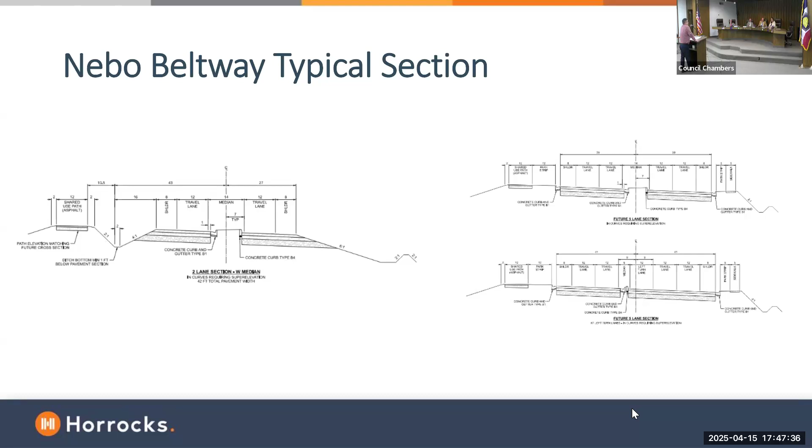There are questions about jurisdiction — we're building this roadway, but who will own it at the end of the day? We don't know that yet; that's a decision we'll have to encounter at a future date, a conversation we'll have. Ultimately, from a UDOT perspective, we have an appointed body similar to the council and mayor, led by people the governor has appointed to the Transportation Commission. They decide whether or not it becomes a UDOT jurisdictional road. With that, we're trying to build it to UDOT standards — this is a key component, so our structure will be big enough to accommodate the vehicle load we normally carry.

For accesses: you have I-15 on the left, those are the ramps we're going to be constructing, and you have Arrowhead Road. This is the area where TRI has primary ownership, I believe, which is slightly different than the station area plan we've seen. We plan most likely for a full signalized intersection halfway between Arrowhead Road and the I-15 ramps, and halfway between that intersection and the ramps or Arrowhead would be right-in, right-out access, with no left turn movements into or out of those intermediate corridor access points.

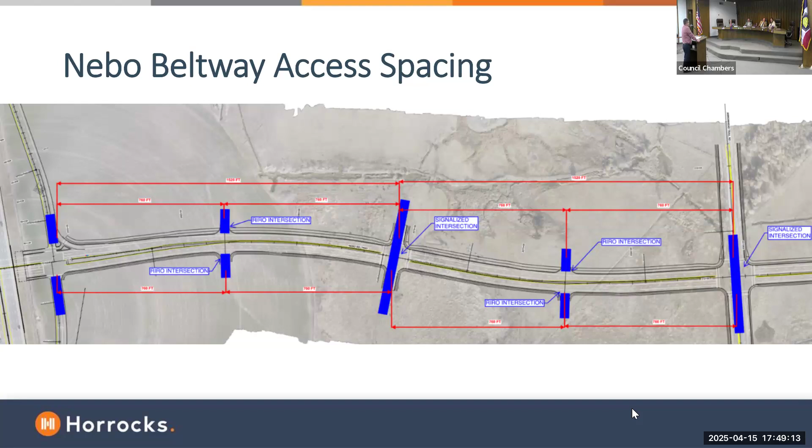That just helps facilitate, if it's built to our standards, then it's easier for us if that's the desire, for UDOT to take over jurisdiction. So that's a thought moving forward. The TOD plan that we've seen has two more access points in that same area than what we're planning for. Just big picture.

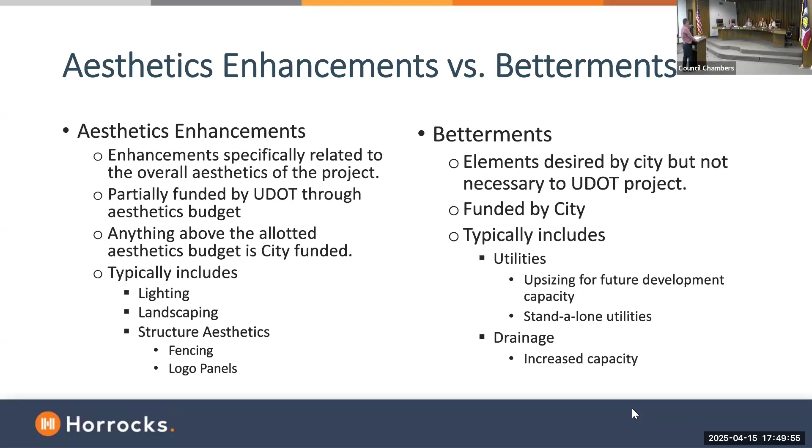Okay, going into the aesthetics, we're going to talk about aesthetics, pretty stuff, and also the betterments for utilities. We're going to talk about some of the baseline budgets, what would be included in our baseline versus what is over and above. We'll give you some examples, not project specific, just so you understand high level what we're talking about.

So the aesthetics along the roadway and at the interchange would be established by our aesthetics committee. The policy gives us a budget, $100,000 per interchange, and then 0.75% of the overall construction value. That's approximately $500,000 to $600,000 for this project. So that's money, in essence, that Payson can use for whatever they would like. If it's powder coating the signals, it would come out of that money.

And I'm going to go through some examples of what would be betterments versus baseline. Anything we want above and beyond that $500,000 would be great. So, conduit for irrigation lines, junction boxes for irrigation lines, conduit and junction boxes for street lighting that is not the UDOT standard. There's been some changes recently in state law with this last legislative session about street lighting. We'll cover that as well. Any questions about this baseline budget?

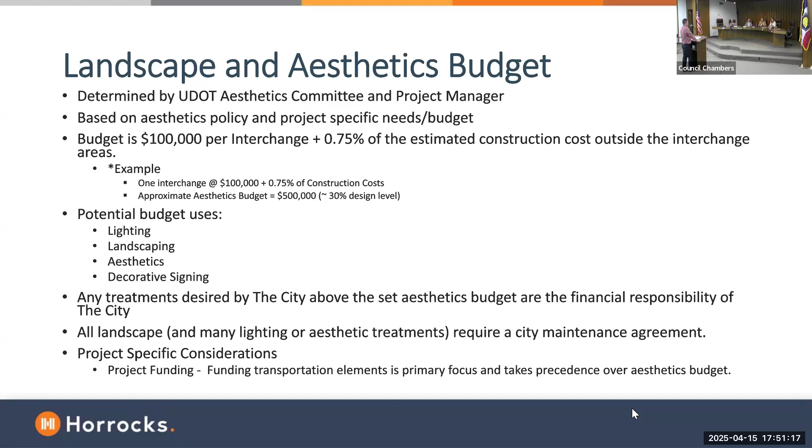Okay, let's go to the next one, Jim. So from a street lighting perspective, Councilman McHugh, this is slightly different than the information we gave when we met with you in the smaller group conversation. As we went back and reviewed the policy, there's some modifications. So it's street lighting at the freeway ramp and termini points, as well as at the signalized intersections. Our baseline does not include street lighting along the corridor. If the city would like to do that, that's an option, and we'll cover some basic costs of what that would mean.

The recent legislation change is, it used to be that anything behind the curb and gutter, including the street lighting, was the responsibility of the local government. The legislation has taken street lighting off that table, as long as those street lights are designed to UDOT standards. So if the city desired to install UDOT standard lighting, one, it's a less expensive fixture, but long-term maintenance becomes the responsibility of UDOT. If the city desired to go with decorative lighting, that's a cost, and the long-term maintenance becomes the responsibility of the city, because that's different than our standard.

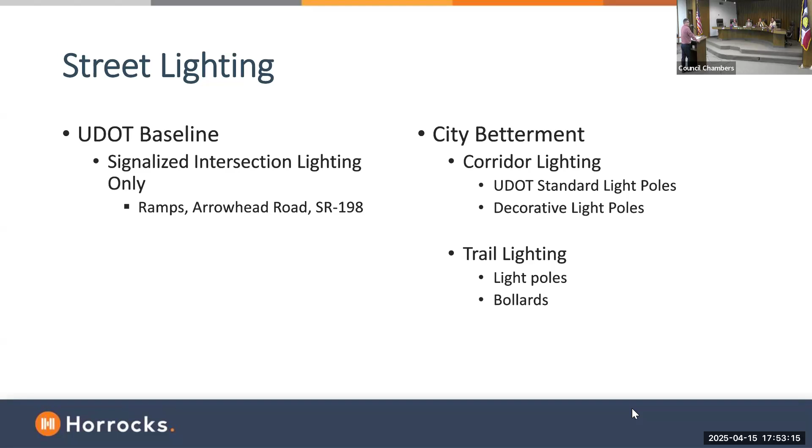That's what would be expanded. What are the requirements as far as how far apart the lights have to be, how many there have to be? I think it's about 200 feet. It would go through a lighting design, and based on the particular roadway or the luminaire type and how it throws light, these standards call for about every 200 feet.

So with the dual arm, UDOT covers that cost 100% then, right? No. Okay, so what do you cover on the lighting versus where do you not? For the corridor, we're only installing it at the signals and at the ramps. So if the city desired to do this, those would be about $5,300 per unit. That's without the powder coating. If you wanted powder coating, about an additional $500. At 200 feet, our corridor is 2.5 to 3 miles long, just order of magnitude. But you'd maintain that as long as it was UDOT owned. If it becomes a UDOT owned facility, it would be long-term maintenance for UDOT.

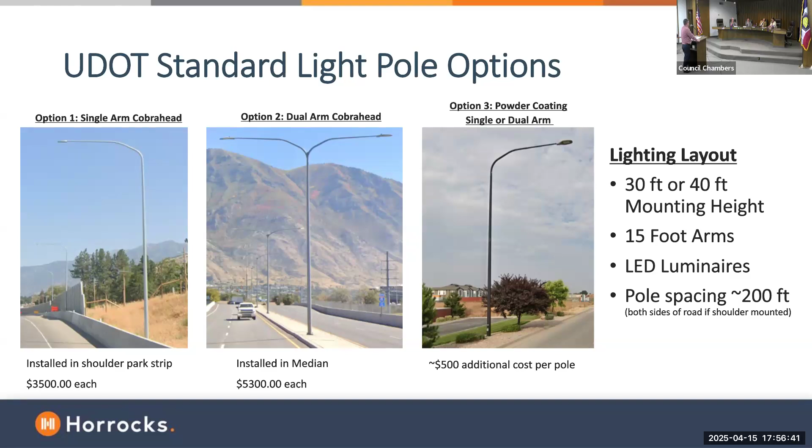So if the city wanted something like this or the option but didn't have the full funding to install the luminaires themselves, one option would be to use that budget to install conduits, junction boxes, even foundations for the poles, so that we would know where the future locations are. The city, when funding becomes available, either with city resources or a contractor, could come in and install those at a future date. So that's something we can do to make it forward compatible, if that's what the city would like.

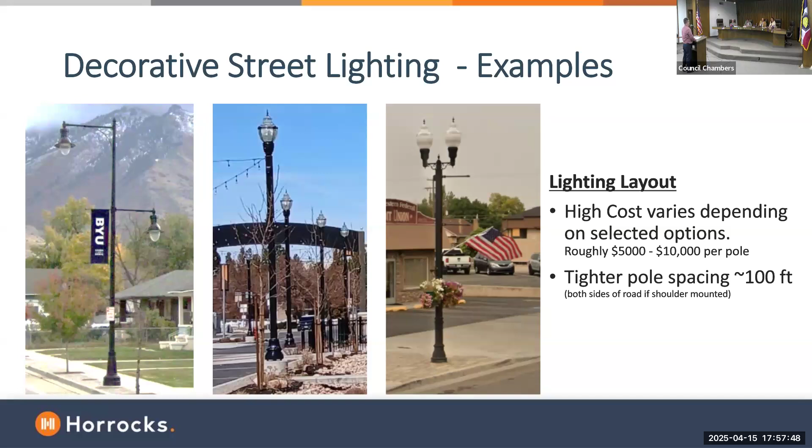How many trails do you see with lighting? I've just never been out there where I've seen trails with lighting. It varies - Jordan River Trail is a trail I use on a regular basis. It is not lit, has trees, growth.

It depends, depends on the area, and the aesthetics or lack thereof, and the safety of it. Yeah, I use it heavily this time of year because the sun is extended into the season. I'm able to get off work and get out with my wife and we do our exercises together before the sun sets or right as twilight hits.

Another question with that too, is if we did the overhead lights in the middle where they go out both sides, would that be enough light to put onto the trail? It would help, I don't know - it's about the fixtures and the way the light gets dispersed. With those fixtures there's probably options to help with that, but a lighting design would help us figure that out.

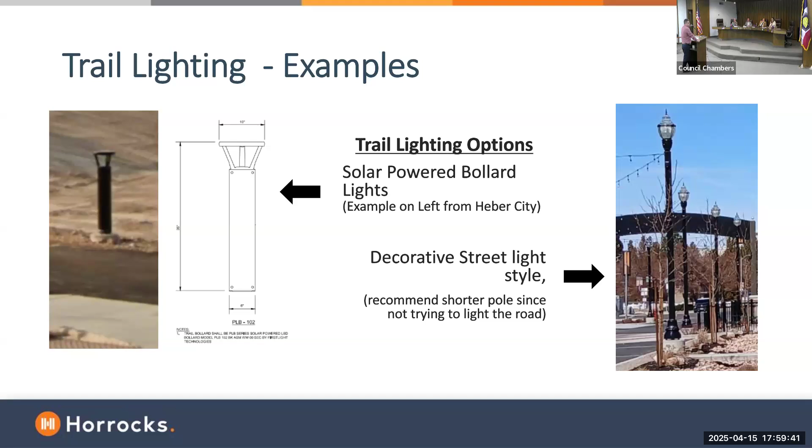Okay, questions about street lighting?

Another question I have, if we wanted to have something that ties into the FrontRunner station, and they're probably going to have some decorative stuff, we could do it just a little ways on the east side and then go to regular.

I think we could customize that design based on your feedback. But if you'd like us to start including it, it would be good to have some feedback that yes, you do want corridor lighting, you want to include it, so that we can include it in the design phase that we're negotiating right now.

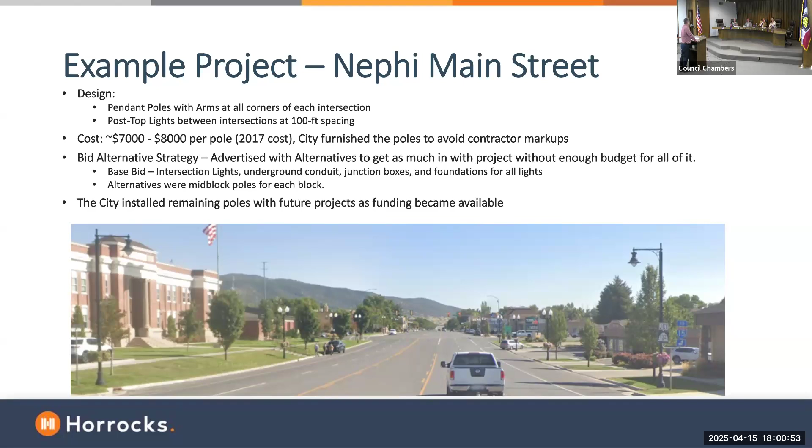You're not ready to make a decision, we get it. So we're handing you information right now. All this is good information, we can go over it. Back to you. Okay.

So baseline is a basic form liner. How far can the relief go on that, for structures? Standard is 1 inch of textural relief. So if you get on a structure wall, 1 inch of relief or change in movement would be our baseline.

Bridge walls, parapet lining, galvanized chain link fencing - what's required for pedestrian safety? We are putting pedestrian crossing across the structure. It won't be connecting anywhere right now, but we're thinking about when it happens.

Accent colors to the bridge girders, the beams that support the bridge deck itself, and then galvanized signals and light poles - that's our baseline. Oftentimes the city wants additional lighting on the structure, decorative fencing beyond that chain link fence, powder coated signs and light poles, city logos. City logos or addresses on the structure is in flux right now.

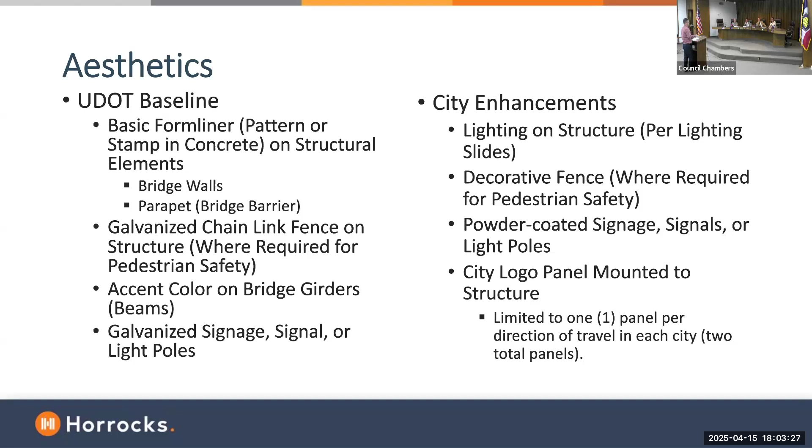Go back, Jill - that limited to 1 panel per direction per travel in each city, is there a change to that based on some of the changes in the aesthetics? Robert asked why, and it's really because it creates more maintenance for us on the structure and on the MSE walls around the structures, and I'll describe those maintenance related issues as we get some different photos. So I get a question on that.

So some of the examples I saw, they're just kind of something on the side of the interchange instead of on the structure itself. So can you put something on the structure itself and have it stamped in it? Yeah, let's get there. Okay, and we'll show you.

So we're building a very wide structure. We're thinking about long-term structure. Our roadway, we planned for, I believe, 2040, 2050. We're currently evaluating the 2050 needs. Those structures have a 75-year lifespan. So we're oversizing that structure, thinking about the long-term viability of this corridor and what we need.

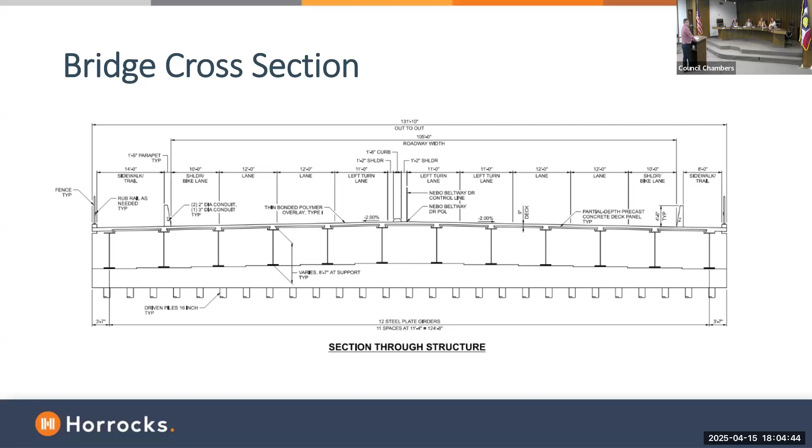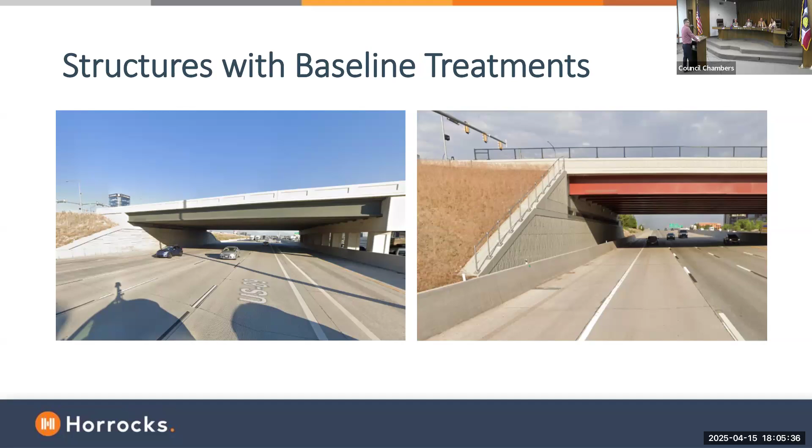If there's other things, I think that captures them. Yeah, a little bit - some of the structural elements on the wing wall there were additional. The column, you can see.

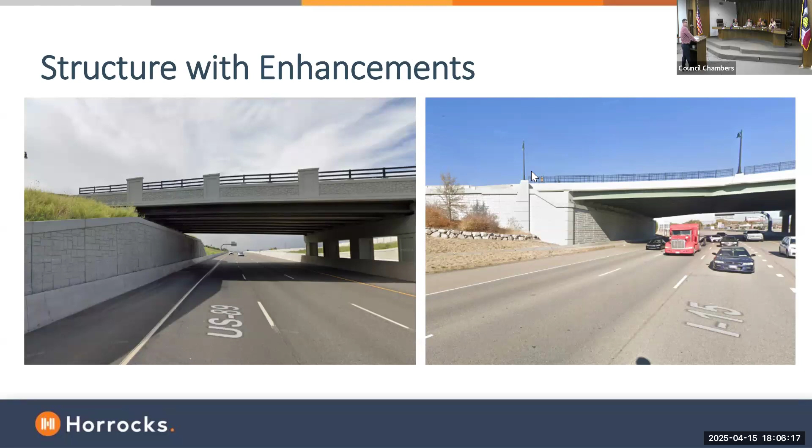Okay, all right, let's go now to the next one. So this one is really the decorative fence and the decorative street lighting option. This is up on US 89.

Okay, this is the one where there has been a change. Councilman Rowley, this gets to your question. Is this the type of city logo that you were thinking of?

I was thinking it'd be nice if we could put it right in the concrete as you go under, instead of on the side. We have some other options. What they're getting to is if you see that sign on the side of the road in that MSE wall, it becomes very difficult for us to maintain and becomes a catch point.

But what about, like the new Layton City exit, they have a sign that's freestanding as you get off the freeway. Spanish Fork has an actual monument, right when you get off. Yeah, I think that looks nice. So those options are available.

And if we had something like that, would the maintenance be ours? That's correct. So the city recently signed the master landscaping agreement. I know there was some consternation, but what it really does is spell out that we won't have an issue on this project. We've already got an agreement in place on who maintains it. Okay, next one.

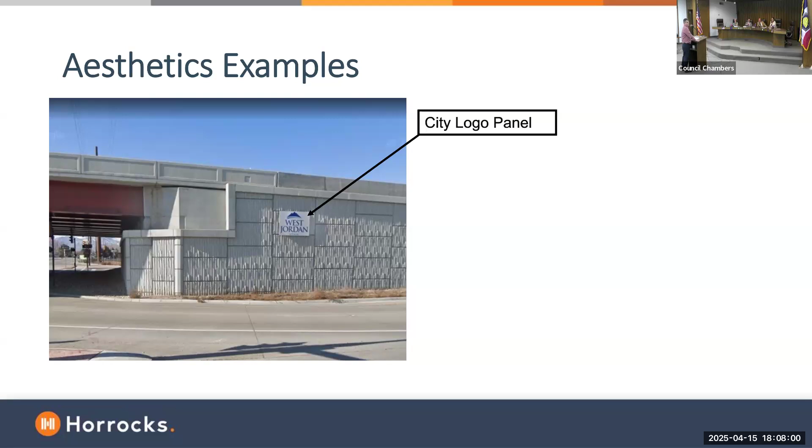So this one has Oak Hills Drive. There have been some at Lehi, Saratoga Springs really wants some, and there's been back and forth with them. West Jordan has some of these, stamped concrete. What I'm hearing is there's an issue with freeze thaw with the relief designs — probably minor in the grand scheme of things, but it degrades the structure over time as water gets into that relief area.

Where this is part of a combined interchange, we're going to be building another structure over Main Street. We'd probably look to install, if the city wanted to do this, the relief maybe in the southbound direction, knowing that in the future the Main Street structure we'd probably put one in the northbound, but we probably wouldn't allow both simultaneously on both sides. That makes sense to do.

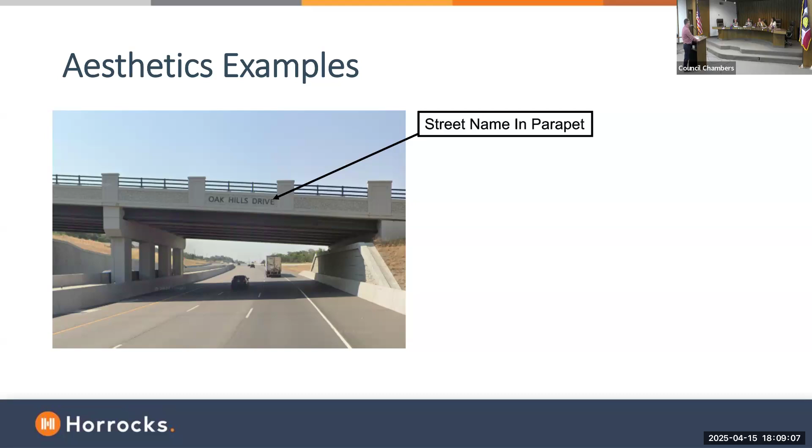Okay, so just from a cost standpoint, this helps you understand costs associated for structures. If you put those reliefs in the structure, it's $17,000 to $20,000, times two if one on either side. We'd definitely work with our aesthetics committee to see if we can get it through — that's something they might reject if that's what the city wanted to do. Decorative fence is $300 a foot, about 500 feet, goes up — there's $150,000 of your $600,000 right there.

Monument signs — this would be a Spanish Fork option. If you wanted one on two quadrants, about 35,000, and the more elaborate you do with those monument signs, the higher it costs. These are just examples, and our standard fence is $80 times the 500 feet. So in essence, we pull that 40,000 out of the calculation for whatever happened at the interchange, and then that delta would hit your allowance, or if you want more, that addition becomes a credit.

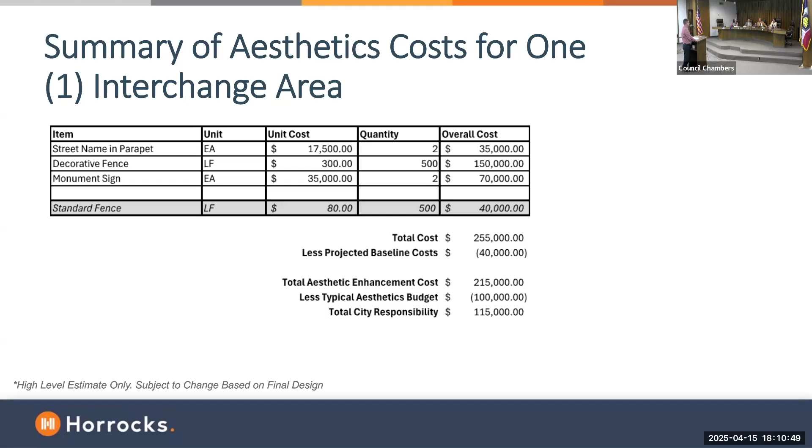Questions about interchanges? What about rocks versus hydro seed? That'll be our next conversation.

So, landscaping — we did get clarification. Dave asked the question, rural versus urban. This is an urban area, part of the MPO area — basically nothing in Utah County is rural anymore. So we'll treat this as an urban area.

So our baseline is stamped colored concrete. There with those fill ditches, we'll probably do, if there's not a betterment or a desire to go with something else, some of that broadcast seed in that area because we need it to be free draining and absorbing moisture where it can. That's really because it's an interim solution. As we get further along, the stamped or colored concrete would be the baseline. Betterments would be the landscape rock.

The city maintenance agreements, we're good there. Plants and irrigation are betterments.

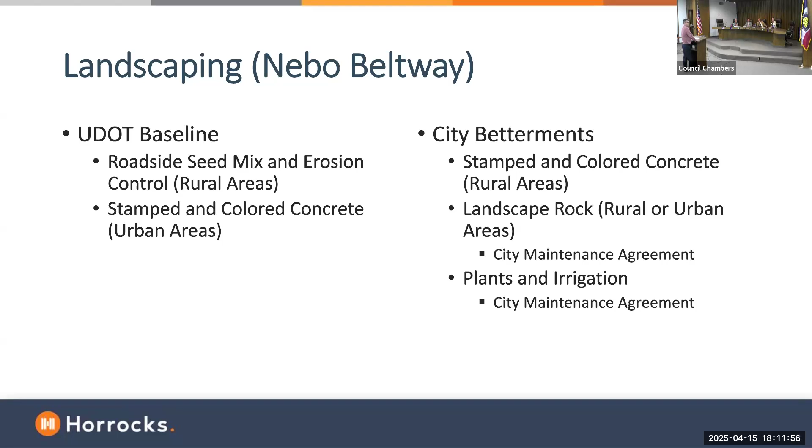With that, we'll go to the next one, which shows some examples. On the left is our roadside seed mix, which is what we would see on I-15 if that's what we did. Here at the interchange are some options, the Layton option, with rock mulch, grass, and some plantings that need maintenance.

And where would stamped concrete be? In the center median would be a perfect example of where we'd probably do stamped concrete, because we have a lot of agencies that want landscaping in the median.

Then they get into the maintenance, they have to shut the road down with a lane down, which requires nighttime closures and requires their team to be out at night working. When you start doing all of those things to maintain it, for the first year or two, we see people maintain it at a high level. Then because of all the added restrictions to maintain it, the desire to maintain drops off, and unfortunately we see a lot of weed patching in our center medians.

That's something we want to avoid. We want to make sure when we get this pristine new interchange that we keep it up. So if you wanted rock mulch, that would be a different option for the center median. Even trees, certain types of trees, would require less maintenance.

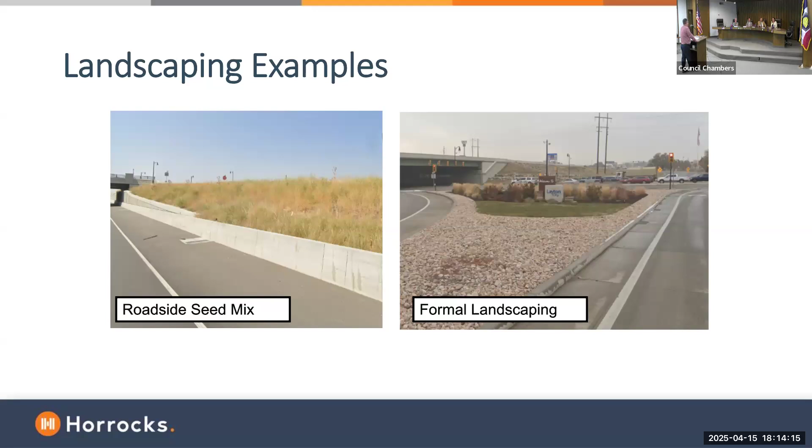Okay, next options. This would be the stamp color concrete, and this is a center median on the left. On the side, this is the separation between the curb gutter and the active transportation, with rock mulch, plantings, and decorative lighting. On the back side, the active transportation area has a broadcast seed, which is the baseline.

Thank you, Joe. Thank you, Joe. Questions?

I drove to Salt Lake yesterday and was looking at all the interchanges. So many of them probably looked really good at one time, but most of them just don't look good at all. You can see the tarp coming in, the weed protection, the rocks are gone, there's weeds. So I want to make this look good, but as simple as possible to take care of.

I would rely heavily on your parks department staff. I'm assuming the parks department is who's going to maintain these features. Rely on their expertise. Spanish Fork is an example where they've made the investment, right? They've done a wonderful job of landscaping, and they maintain it, spending a lot of time and money doing it. It's really about what the city wants.

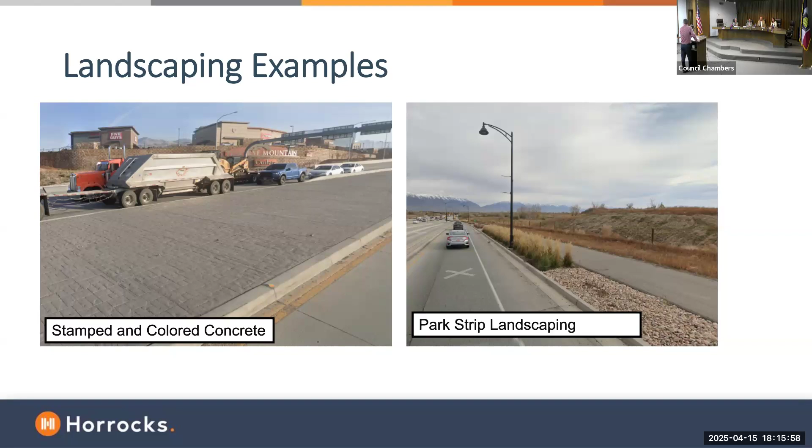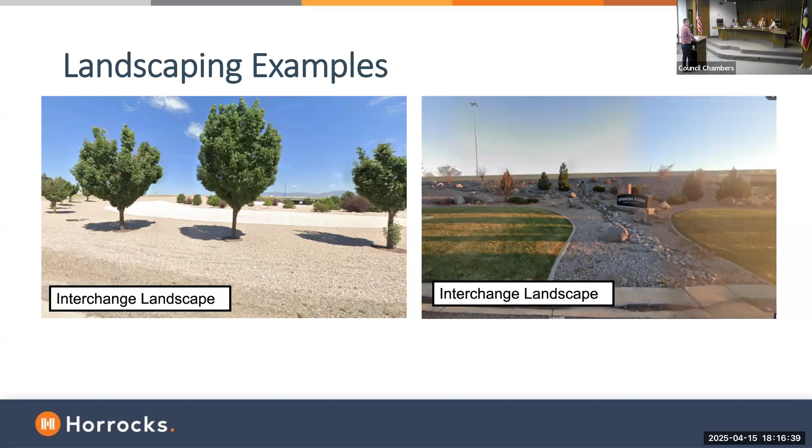So, options. Okay, next one. This is in Pleasant Grove. This one actually used to have a water feature that ran down the center of it, but it became a challenge for the city to maintain.

They did. When it was open, it was a beautiful, magnificent interchange. Yeah, we'll save all the water features from St. George, if they need them. I like it.

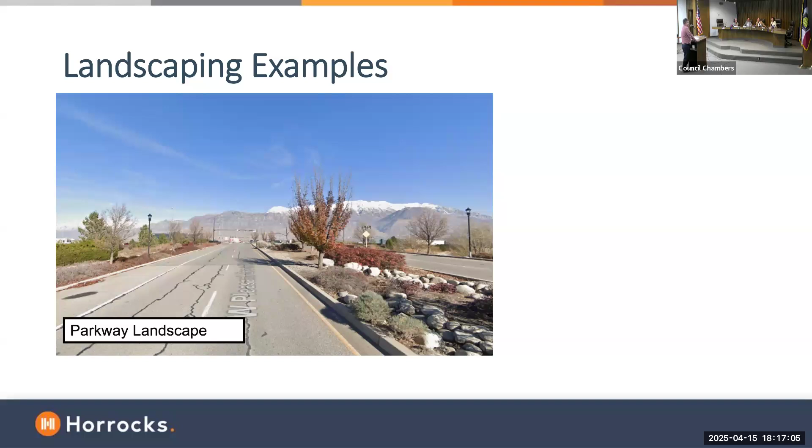So these are just some examples for a corridor of our lane. The upper options in white are the betterments. The gray option would be the baseline product that we would install normally. This project has a $260,000 baseline budget. The total cost is 1.3, so the betterment cost is 1.04.

Something I want to plug in, and hopefully staff's listening, especially around the future station area plan - I'd like to avoid landscaping and shrubbery. I don't want to make anywhere comfortable for people to hang out and camp out. As we get away from that, we can entertain some of those ideas, but I think we avoid coverage in those areas.

So this is a perfect slide to talk about. I have a recent project working with local government. We sat down with our parks department, designed a robust landscaping plan - it was beautiful. If funding wasn't the limit, this is what we do. When we gave them the price tag of $1.8 million, they gagged, and I respect where they were at that point. We were surprised at the numbers when we got them all assembled and assigned the math to it.

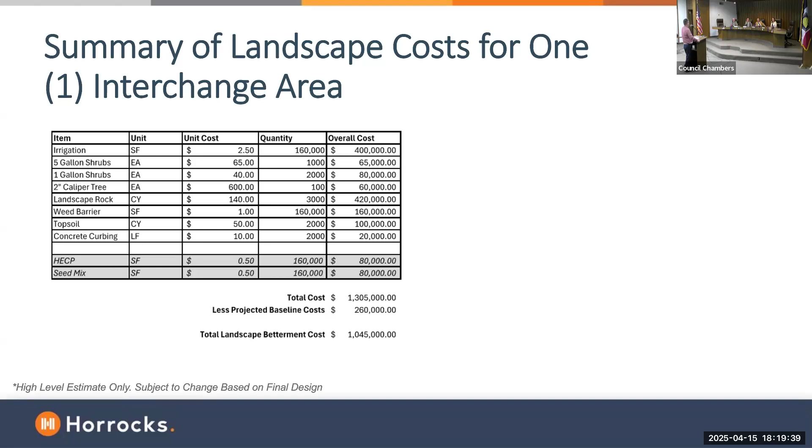Okay, next one, it's just a similar example, 2.3. If we did what we showed for the entire corridor, between the interchange and the Eagle, it's $3.5 to $4 million.

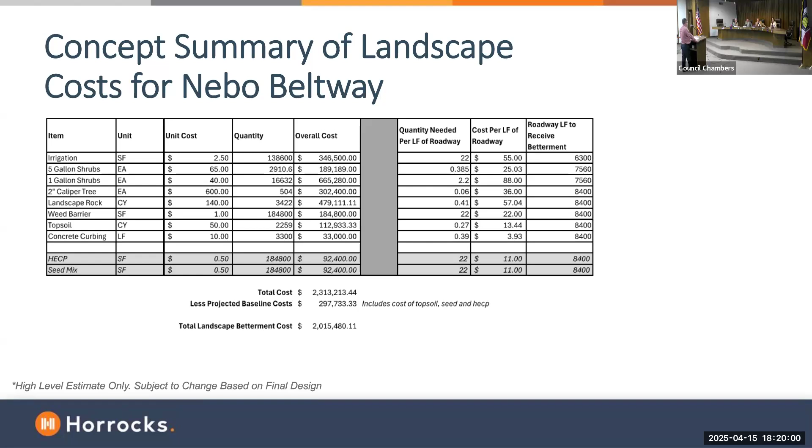Next one is city utilities. So we put in a storm drain system as part of the project, but we don't put in water, sewer, irrigation pipelines that cities are going to, or utilities - gas, fiber, electrical that you want underground. If the city wants those included, quite frankly, now is the time to get those installed.

We're exploring with the funding opportunity, so we've provided your staff with some design fees, because we've heard that we want to include those. That's probably one area where, if the city wants to go down that direction, we would like to start that process. So that would be some really positive feedback we could get from you today, if possible. We know you've been talking about it.

I do have a question on that. If we're only going 2 lanes wide, is there enough room to still put the utilities in the next phase when it's widened, or not? Because I want to get the utilities in - if we have to do it now, I want to do it now. But if there's an opportunity to do some later, I'd like to, if there's an option.

I think it's going to be the lateral cuts, to drop services into the properties adjacent to the corridor - that would be the issue. We go in and install a corridor, development comes in, they need to cut it. We'd like to avoid those cuts on a brand new surface. They have a 5-year window anyway, don't you? Well, I don't know if we do. We would love to, but it seems like too often we pave a project and then a utility comes in and says, 'Oh, we want to cut it.'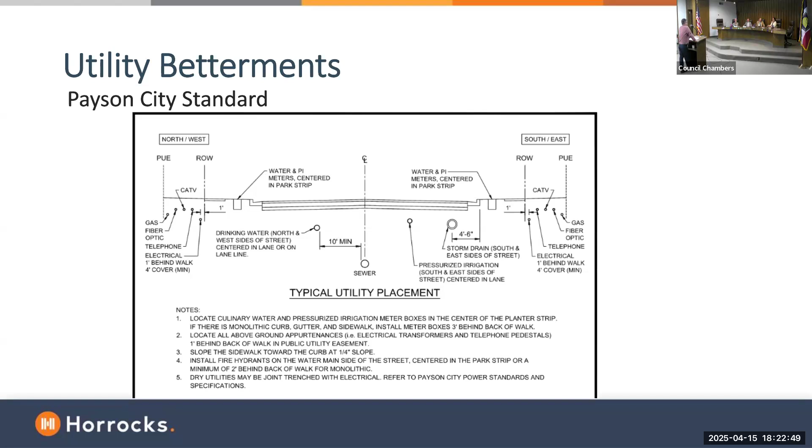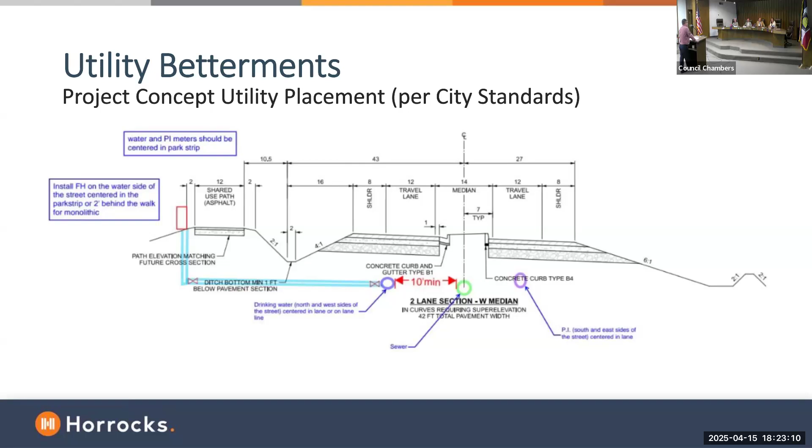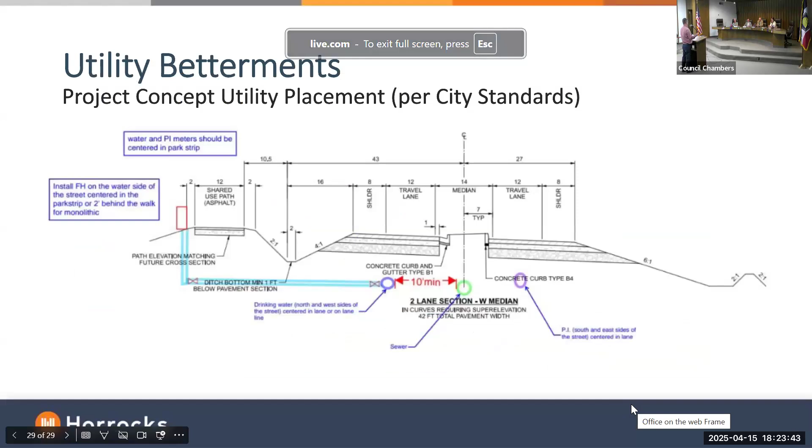Presented it to us in there, pretty straightforward, that's what we like. So as soon as you're ready to make a decision, we'd love to see it. Time is of the essence for us. We're going to meet all the time schedules and get this project completed by 2028, and we need to include some of that stuff. We don't want to slow you down.

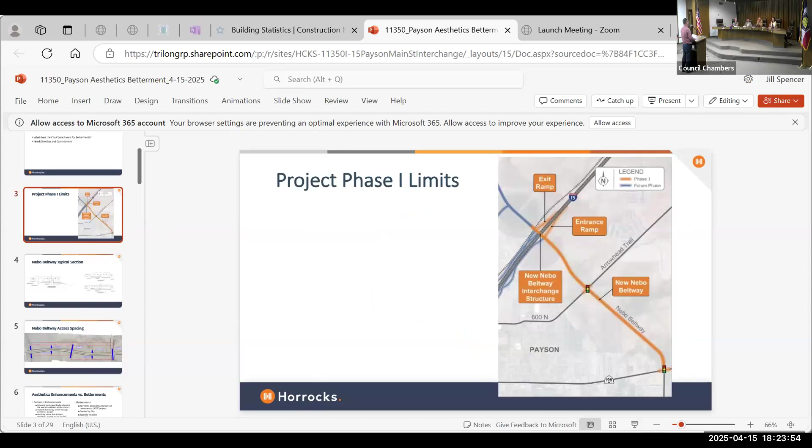Well, that's what I'm getting at, specifically for this stuff. We're at a critical junction. If the city needs us to go forward with that, we need to move forward in that direction. We're going to discuss that with you, I think Monday the 21st, so we're on that timeline for you. Thank you, I appreciate it. So that process, if you get us to go ahead, we develop a cooperative agreement, get it signed, and then we would include that in the design phase.

I don't know if we're finished early, but if you have questions, anything we can do for you. I think you've really given us some information for thought, and we can mull it over and come back. You're going down the area that we want. We want some betterments, a little bit better than the status quo, but we're going to have to come to an agreement with that. It's a big deal, yes, and especially for a small community like Payson, we understand.

Mayor and Council, just as a summary, we don't get this opportunity very often, and this will be a new gateway to our community, so we're really excited about that. We're excited to have these conversations to see what the possibilities are. We do know we need to look at it from a phased approach, a funding approach, and a maintenance approach. I know all of you have driven along I-15 or other connector roads where you've seen enhancements put on there, so we'd encourage you that if something stands out in other communities that you feel is more important than others, we might have to balance that at the end of the day.

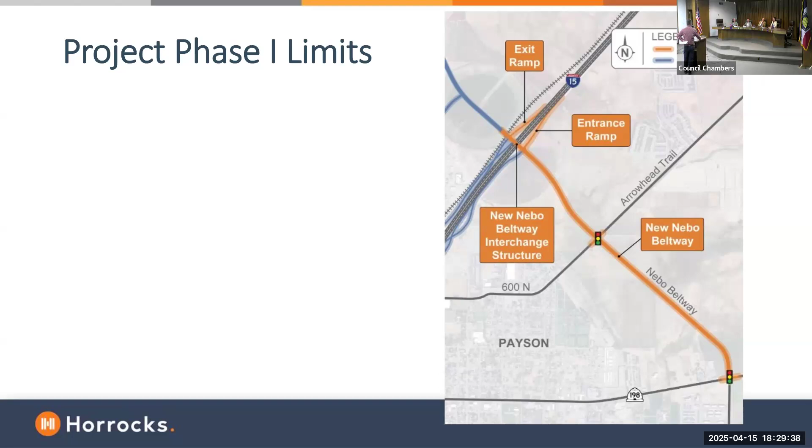Thank you, Eric. Appreciate it very, very much. Anything else, council?

Appreciate it. I think we're gonna try and get on a regular rotation again to give you updates of where we're at. We are reaching out to property owners, just to give them the basic, here's the project. We're not having any conversation about acquisition yet, but just having conversations with them, just to let them know that the project's coming.

I do have another question for you. So in phase 2 and 3, are you engineering for the whole thing or just for this first phase? This first phase of design that we've gone through has been looking at forward compatibility. So we've done, in essence, a 30% design of the entire interchange to make sure that what we're installing with this project doesn't prohibit something in the future phase.

So if we can get funding, is there a way to do a design build the rest of the project so it goes faster? Yeah, that is another question I have to do some research on.

At bare minimum, we could fire up the design for that additional stuff. When we did the procurement, we did it for the entire interchange, not knowing what was gonna happen from a funding perspective. So we shaved time because we don't have to procure a team, but it's how we deliver the project at the end of the day.